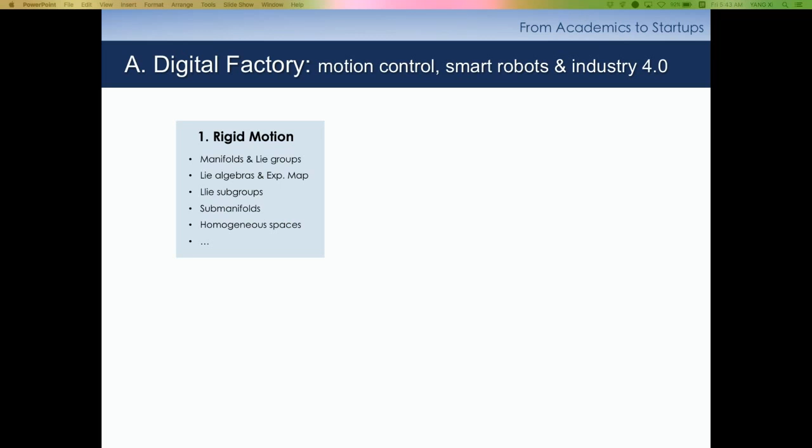Those are the tools, and then the research, and then the product design, and then the startups, and back and forth. So these are some of the things. If you take Math 214, it's all there.

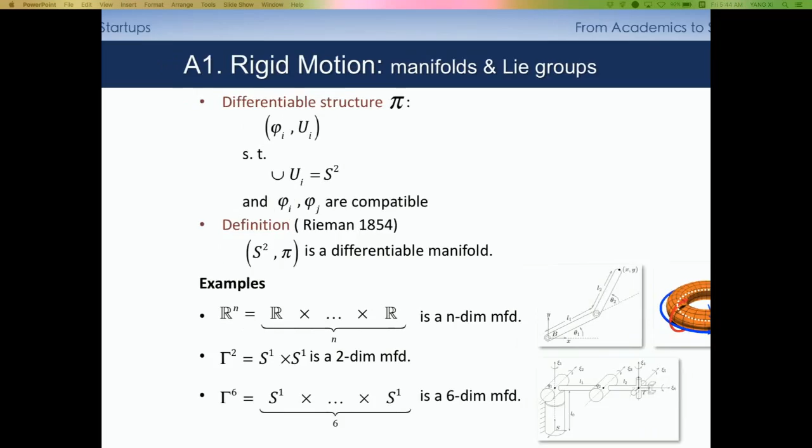It took me 20 years to understand and also connect them with some of the real problems. So I will not go through those things in this short period of time, but anyway, all those things you will learn.

So that is the first application, as pioneered by Roger Brockett, and also in the book, the product of exponentials, using that formulation to derive beautifully all the consequences: the Jacobian, the inverse kinematics by Brad.

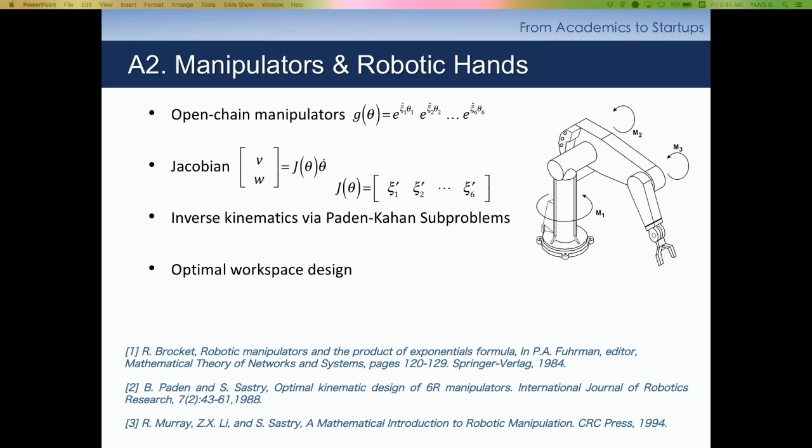Optimal workspace design, and also the new formulation of rigid body motion dynamics, and using that to formulate the dynamics.

The thing I like to say is that using the geometric tool, you get much more compact, much deeper intuition into this concept, and your algorithm will be much more efficient than otherwise possible.

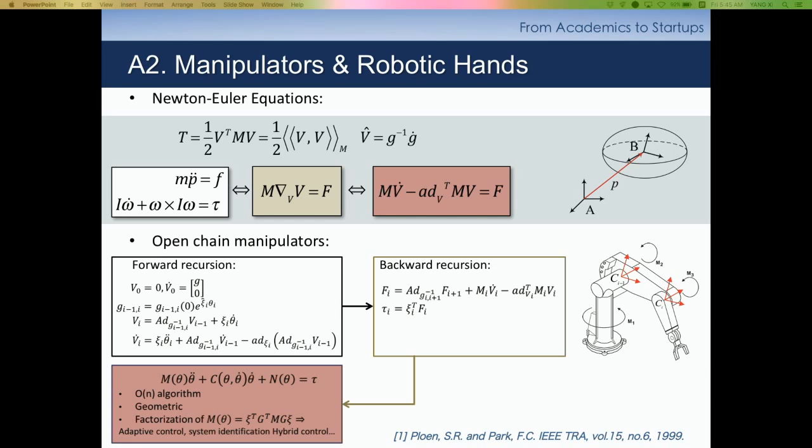And also multi-finger hands—I think Steve also had a paper on this. It's a convex optimization problem in the space of a Riemannian manifold, and I had to read some of Steve's book in order to apply those techniques.

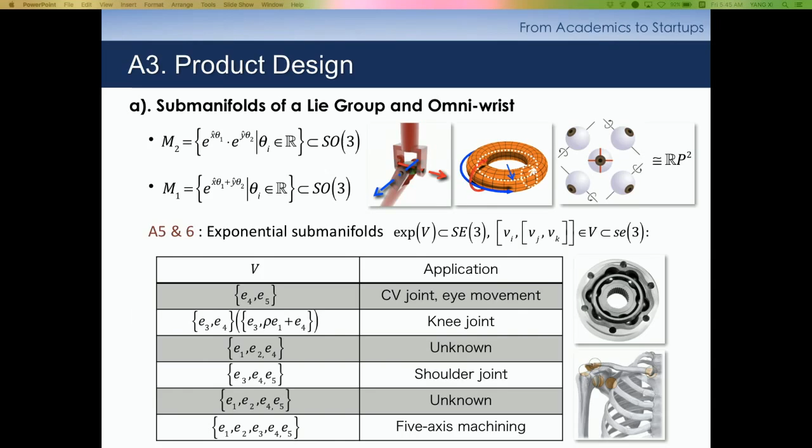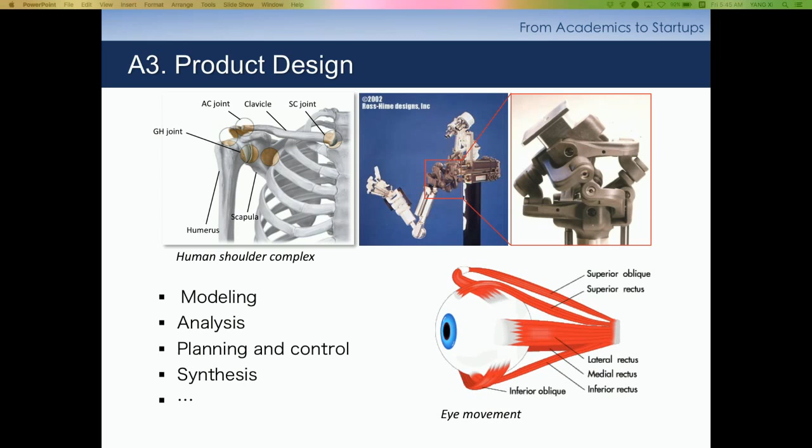And this is another set of products that we made, using the tools to design shoulder joints, to understand eyeball movement, and that is very important.

We also did parallel robot design using those differential geometric tools, and advanced machine tools for 5-axis machining. We really got the formulation for designing those machines in the right perspective.

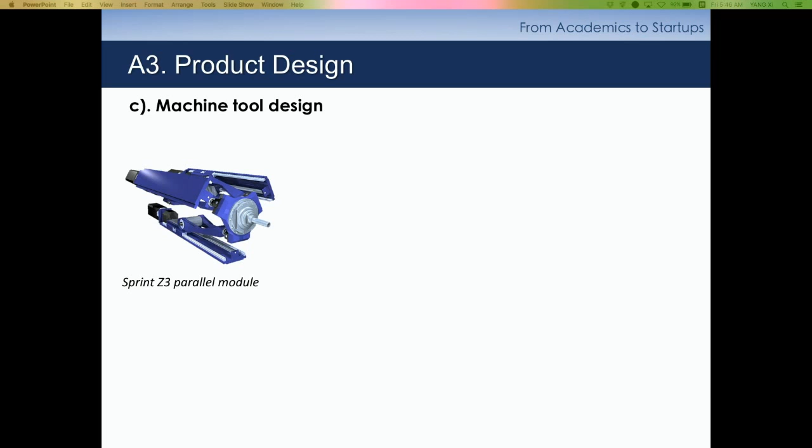And also CV joints for automobiles. Nowadays we see left and right hands become human-like robots appearing in factories, but how do you model those kinds of robots?

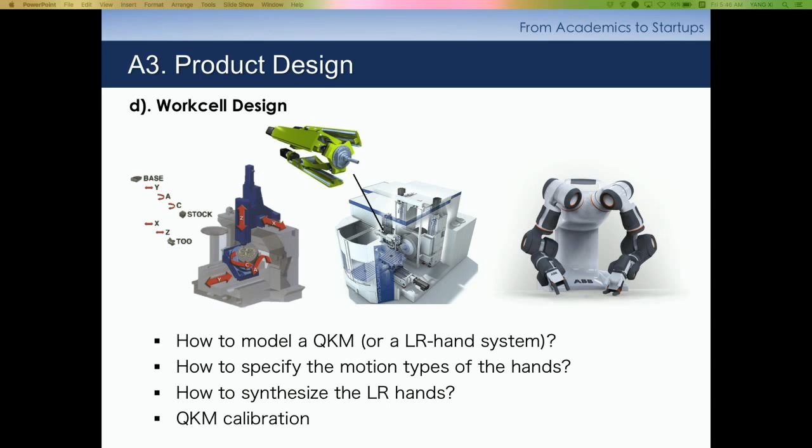And how do you, not just for individual cases, try to generalize this to other types of machinery, interaction of many different machines together to accomplish a complex task.

So that is also an example, and this is a setup we had to assemble the motors in DJI drones, because before, all those motors were made by hand, and the quality, the cost, everything was just terrible.

So we decided to do the manufacturing and assembling using robots, using 3D sensing algorithms, workspace modeling, offline programming, and also kinematic calibration of the whole thing.

Our goal is that we could assemble the drones entirely by robots, and the drone would fly itself into boxes for packaging, and perhaps for delivery using drones to your home.

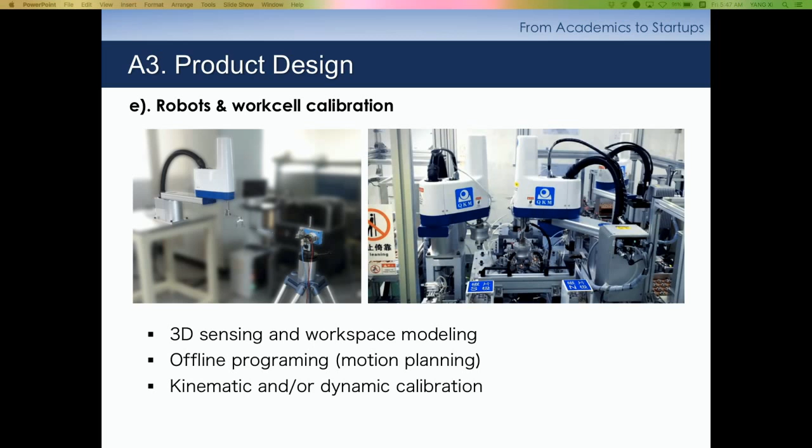So that is— and also workpiece calibration. How do you, in a single formulation, handle workpieces of completely different shapes?

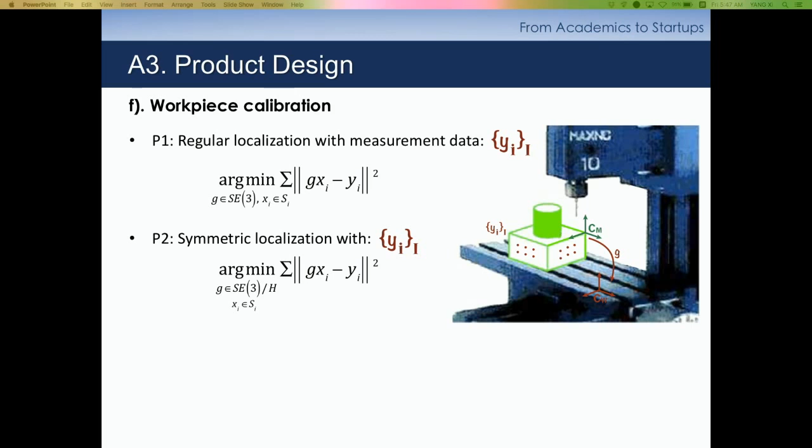Least squares in the group, in the homogeneous space, and all those things. So I think the next phase, once you have the product, is that you can formulate or start up companies.

And you have a competitive advantage.

And then we began to build controllers, and those are some of the progress of the company—motion controllers, embedded and networked, and also a control system for the whole factory, not just for individual machines.

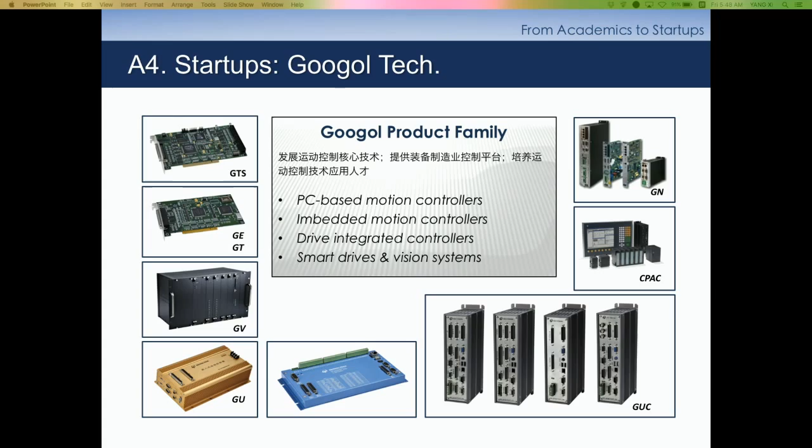And now we have around 50% of the market share in China, and have experienced very rapid growth.

And this is another startup. You can see that all the names of the companies—Quotient, Kinematics Machine, Googol Tech—have mathematical names.

So this is a tribute to the things that we learned as a graduate student here. And this company, QKM, wants to design and build industrial robots.

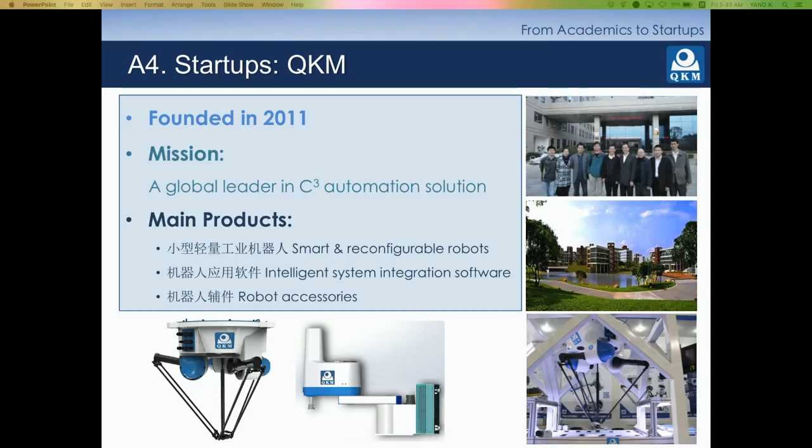We did a lot of research. People said we were crazy—there are already famous big companies there: ABB, Kuka, Yaskawa, Fanuc. There is no place for industrial robots to emerge, they said.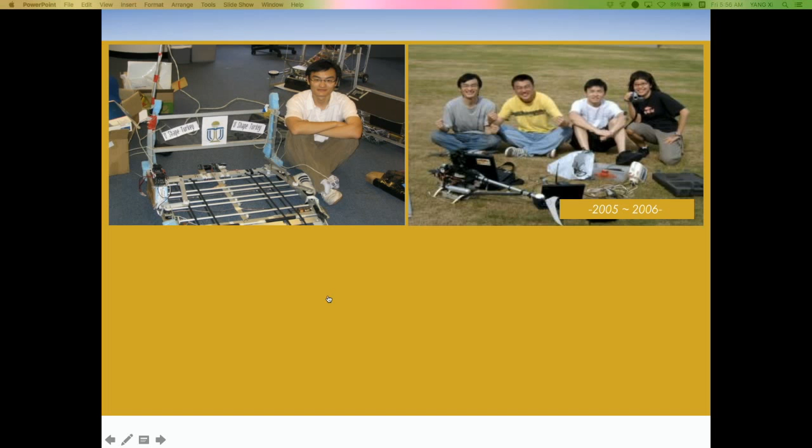He took the project design course twice, did his final year project, and also built a very shaky autopilot system. Then in 2006, he set up a company in Shenzhen, hoping to sell a few autopilots to make up for his tuition. Every time I gave him a challenge, he was able to do it.

I like to go to the mountains. I said I want to climb Mount Everest, and can you get your drone to deliver a bottle of oxygen to me if needed? And also take pictures of the beautiful glaciers, which is impossible for a human to look at. So we went to Mount Everest, and I saw him quickly assemble the whole thing and be able to fly. So I said, I don't have to give you a test, you can pass.

This is every time we have a new product, we will go to the Himalayas and try to test it. And I said the ultimate challenge is to be able to land a drone autonomously on top of Mount Everest, which may take a couple of years, but we are still working on it.

These are some of the recent pictures, 2010 and 2014, and the beautiful glaciers which you've never been able to see. And this is the first useful mission.

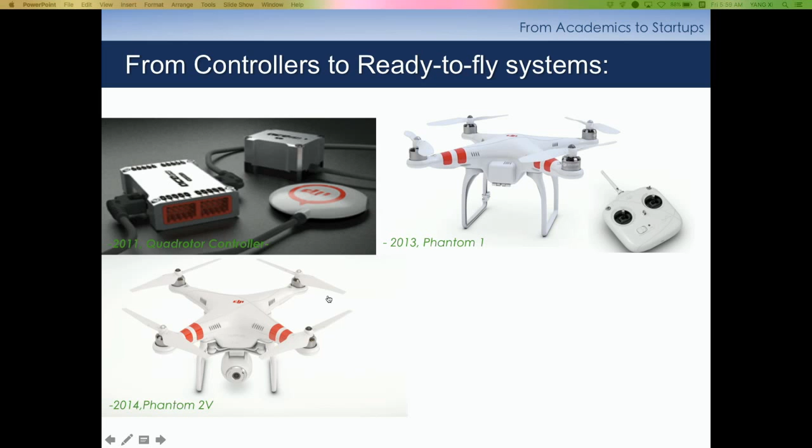Then sometime later, we released the first ready-to-fly system, and that had a big impact on the industry. I'd like to show you a video of the recent...

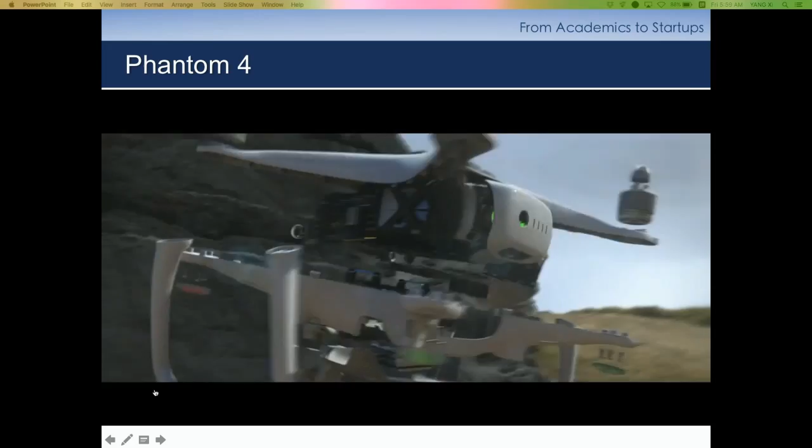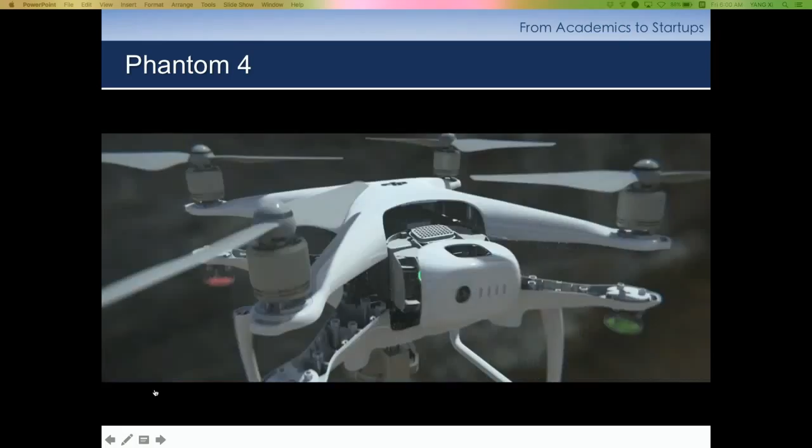Creativity is at the heart of every dream. But once the idea is born, you must race against time to bring it to life. DJI introduces the next evolution in speed and intelligence, the Phantom 4. With elegant design dedicated to performance and precision, the Phantom 4 allows you to focus on being as creative as your heart desires. The Phantom 4 combines beautiful design with speed and power, making it the world's most advanced quadcopter. A powerfully integrated sensory network is at the heart of the Phantom 4. Artificial intelligence commands an advanced obstacle avoidance system with front-facing cameras that detect obstacles up to 50 feet away. This innovation takes the fear out of flying. Soar at the speed of imagination.

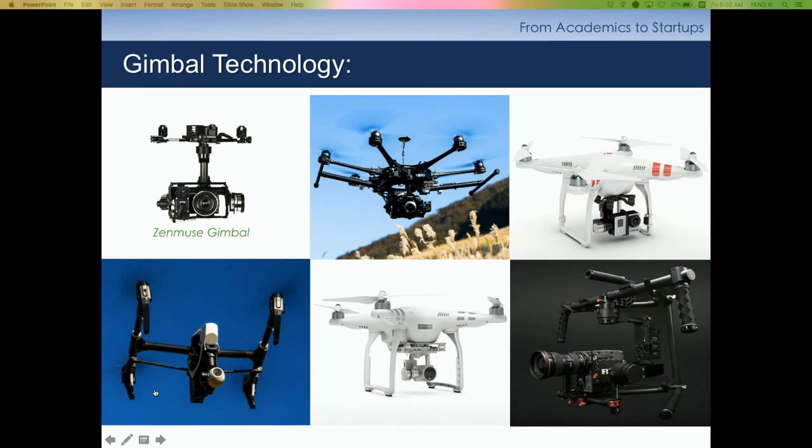So that was a promotion, and actually it was recently selected by a Time Magazine reporter as one of the 50 best electronic gadgets ever developed over the last 50 years. Those are some of the other products under the gimbal technology, which I will not spend time on, and the communication technology. These are the current product family, and the media and recognition they've received.

I'd like to say a few words on the applications of the technology, not just for consumers taking beautiful aerial video. Of course, the first is photography and cinematography, used in all media. And the inspection of telecom towers—last time I was here, one guy said every year 300 people die climbing the towers to measure and fix them. Also 3D reconstruction. I will just show one quick video.

Filmmakers create dreams. Filmmaking by operating a drone is becoming as easy as bringing the dreams of a Hollywood director to life—no matter how beautiful, crazy, or inconceivable the shots of these buildings are, making these dreams a reality is still difficult. Sometimes we get distracted from our vision by mundane tasks, and the logistics of filmmaking can be overwhelming. It can hinder our most genuine and sincere efforts. But now the rules have changed. Filmmakers now have access to a tool that can facilitate their vision: first fly the drone to collect all the information, 3D reconstruct the model of the cities, and then you can pre-plan the scenes and camera movements, and the drone will fly according to the planned shot. Grab and move the frame, preview the shots before you get to your location. Our sophisticated drone will get the shot exactly as you want, simplifying everything. The creation of your vision takes a front seat.

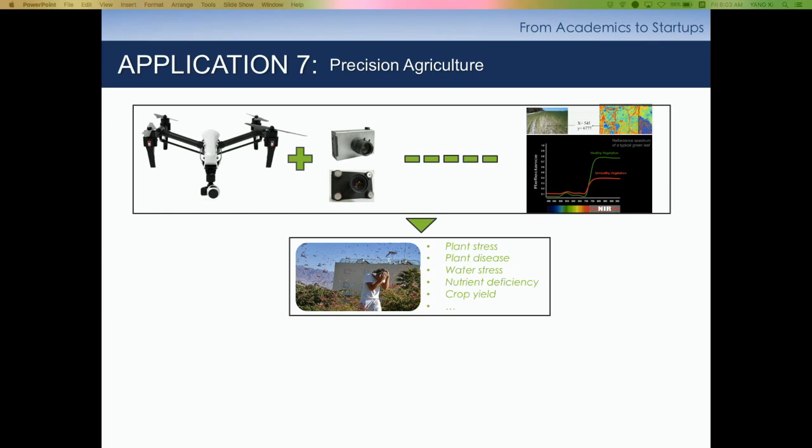Another emerging area is precision agriculture using drones. You attach infrared or near-infrared thermal cameras to monitor crop growth and pesticide conditions, then fly drones precisely to spray on the spot. In China, each year 30,000 farmers die from manually spraying chemicals and pesticides.

Despite Claire wanting to kick me out, I'll show you a video.

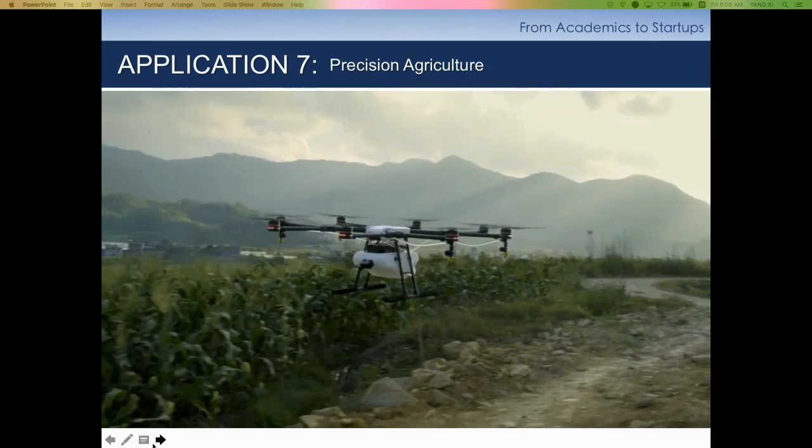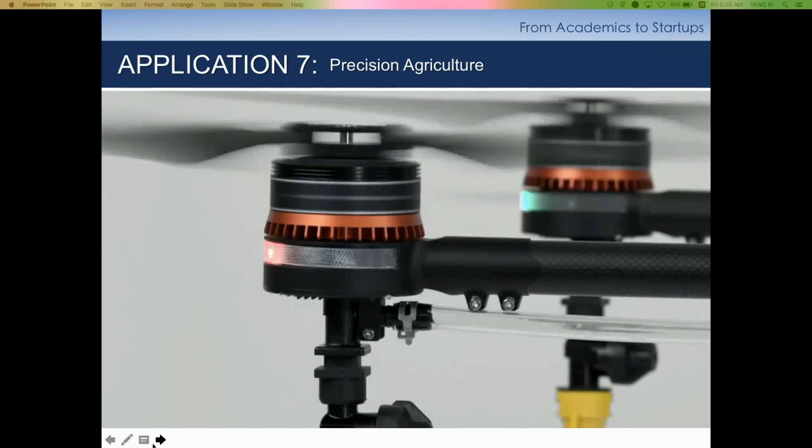With every generation, we've made flying easier, more reliable, and smarter. Now we're bringing this expertise to the world of agriculture with the DJI Agras MG1, the first agricultural aerial platform designed for ultimate effectiveness, industry-level reliability, and precision spraying. One single Agras MG1 can carry 10 kilograms of fluid and cover 10,000 square meters on a single charge, 40 to 60 times faster than manual spraying. The Agras MG1 is dust-proof and corrosion-proof. It's also water-resistant, so at the end of a spray it can be rinsed clean. Its extreme reliability comes from a specially designed internal cooling system: air enters from the front, and mist, dust, and large particles are filtered out before reaching the motors, where heat is dissipated into the surrounding air. Industry-standard ceramic nozzles come pre-installed and can be swapped out if necessary. Spray quality is further enhanced with a downward-facing radar that keeps the Agras MG1 at exactly the right height above the crops. Using the Agras MG1, modern farms can spray faster, more accurately, and more efficiently, bringing the DJI-powered aerial revolution to agriculture.

So a brief summary: project-based learning and multidisciplinary teamwork, fast iteration from design to rapid prototyping, and faster scale-up. This is the principle of the Jacobs Institute, integrating art, culture, and science with engineering.

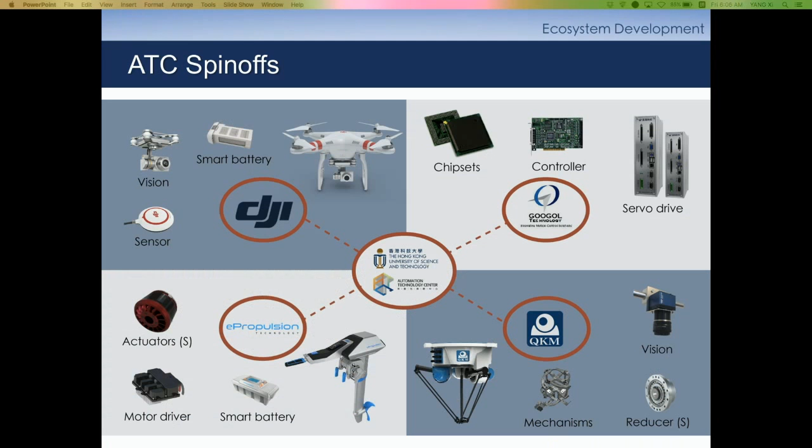On ecosystem development, I won't say too much. This is where we are. I think people call this place the Hollywood of makers. The speed at which you can turn an idea into a product is probably 10 times faster than any other place. We believe this is an extremely valuable asset for any students to have.

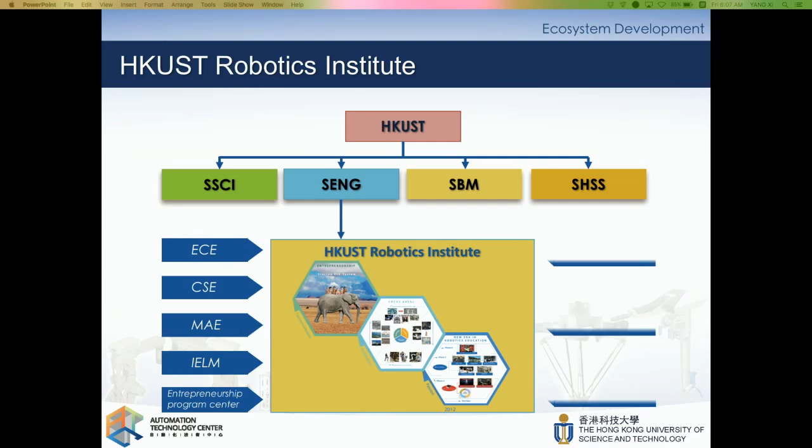So we decided to build a robotic incubation facility, not just for our own students but for all students from elsewhere. Next summer we're going to run a boot camp with the Robotics Automation Society so that students can come for one week to use this facility. And we formed the institute as an umbrella organization.

We also see that microelectronics has driven several major killer applications: computer, internet, mobile, smartphones. What is next? The answer is robotics. And it's difficult for us to do it alone.

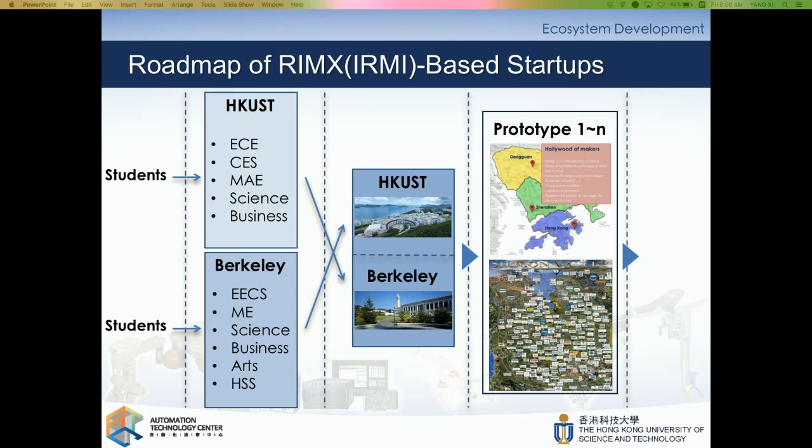So I thought we needed a partner to work with us. I talked to Shankar, and he was extremely supportive, with around a dozen faculty. We established the HKUST Berkeley Research Alliance program in the area of robotics, intelligent machines, and microelectronics. The hope is that students from both places exchange knowledge—knowing Silicon Valley or knowing Chinese industry—and work as a team to rapidly iterate their designs until they're able to do startups. That's the whole ecosystem, and we have a few other ongoing projects.

We're building an international school and hope to use project-based learning from K to 12, and also a robotic school using the same philosophy, plus a couple of other projects.

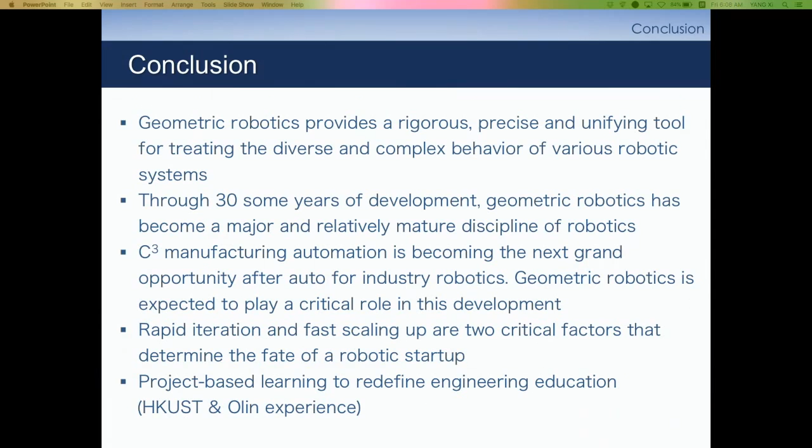In conclusion, I don't think I need to say any more. So what I'd like to say is thank you, Shankar, and also all the fellow students and faculty.